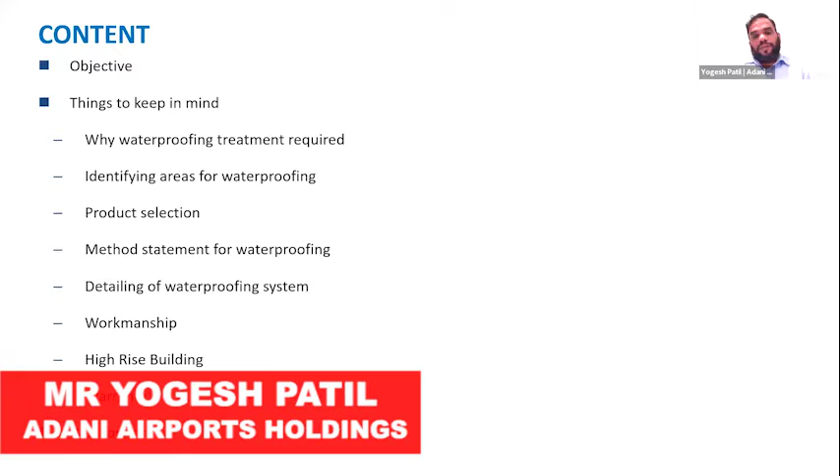So before moving to content, how I started studying waterproofing. In my last organization, we had a lot of seepage complaints from customers, and our NPS was going down due to that. So major complaints were seepage from terraces, from toilets, retaining wall, water seeping through expansion joint, etc. So after a lot of discussion, the task was given to me by the management to go to the root cause analysis and find the solution.

So to study the problems, I visited all sites across India, studied available practices with waterproofing products, and came to the conclusion that we need to improve in each and every step of the waterproofing process. The outcome of that was 1 year long working on SOPs for the 23 elements with an external waterproofing consultant and all internal stakeholders. So this is how I started studying waterproofing.

So the content will be objectives, then things to keep in mind, which will be bifurcated into why waterproofing treatment is required, identifying areas for waterproofing, product selection, method statement for waterproofing, detailing of waterproofing system, workmanship, high-rise building, warranty, and way forward.

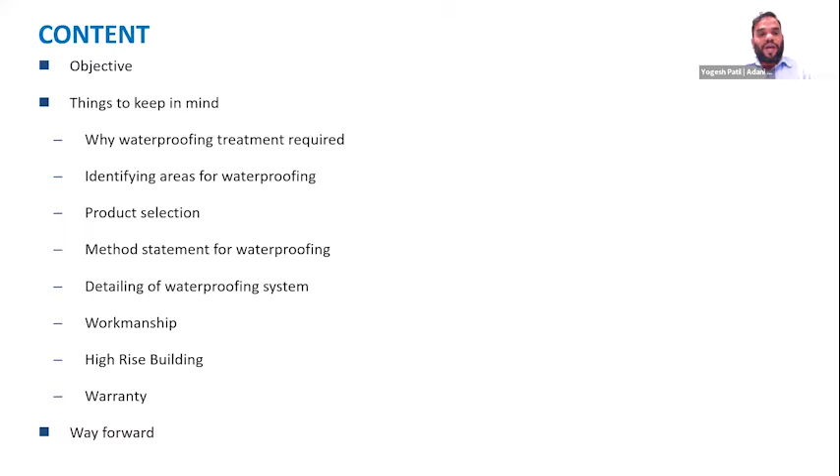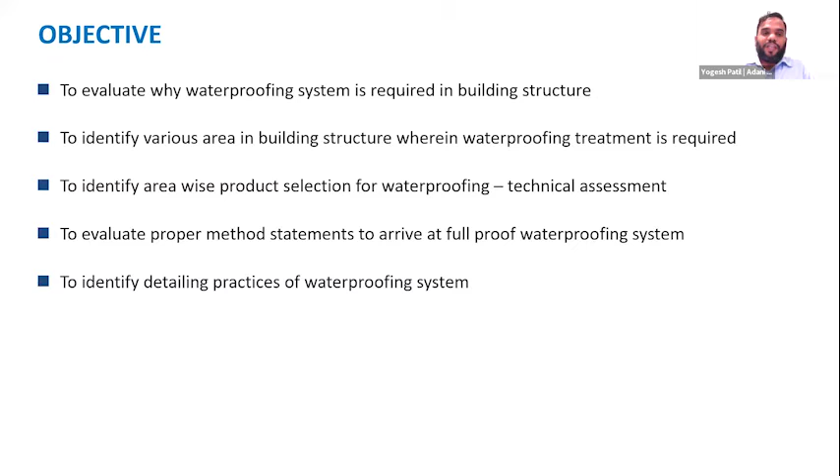So the objective of this presentation is to evaluate why waterproofing system is required in building structure, to identify various areas in building structure wherein waterproofing treatment is required. Thirdly, to identify area-wise product selection for waterproofing with technical assessment. Fourth one is to evaluate proper method statement to arrive at a foolproof waterproofing system, and to identify detailing practices for waterproofing systems.

So why is waterproofing treatment required? It's required to avoid damages to building structure due to seepage of water. Damages result in corrosion of reinforcement, delamination of plaster from concrete, or delamination of paint due to seepage water. Secondly, to avoid unhygienic environment inside habitable spaces due to seepage or dampness. Unhygienic means fungus due to seepage water or dampness, or bacterial growth, which should be avoided. And thirdly, underground tanks which are in contact with soil. If we don't do proper waterproofing, the water will get contaminated.

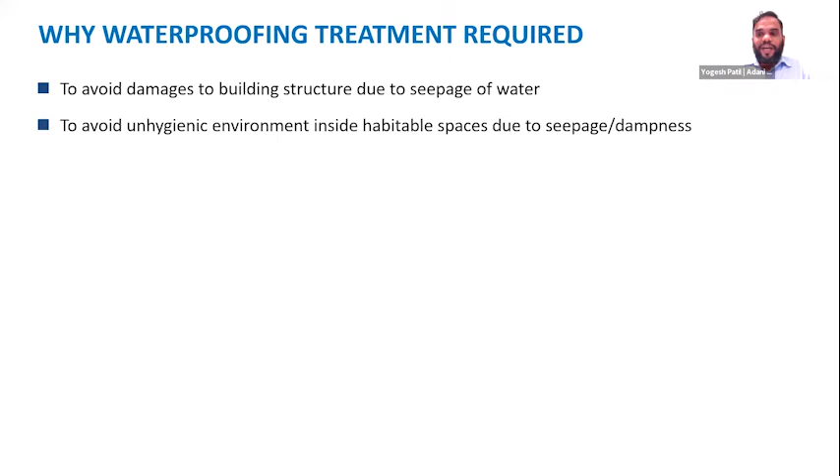So this is a pictorial view to understand the elements which need to be waterproofed properly. You can see from the right side, it is water tank, that is overhead water tanks, then exterior wall protection, inside building wet areas which are covered by toilets, kitchen, balconies, kitchen utility areas. In basement, you can say UG water tank, lift pits. In basements, there are raft and retaining walls. In podium, it is swimming pool, podium itself, which is exposed to rain, and terrace.

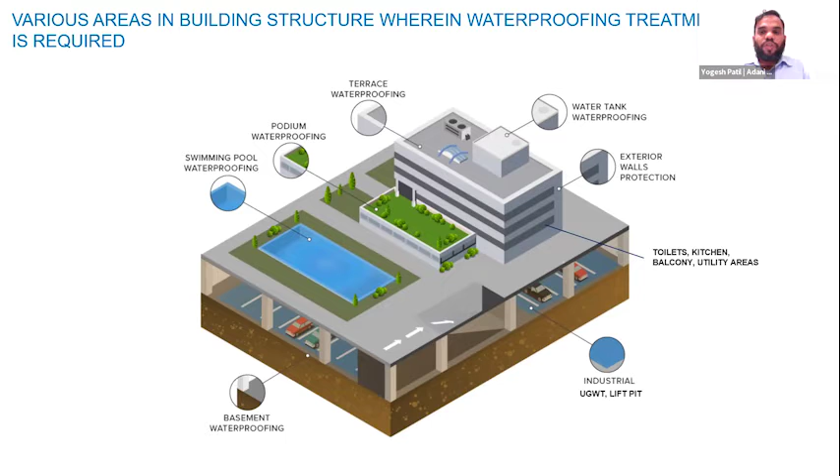So apart from this, while doing construction, there are expansion joints, construction joints, tie rod holes, pipe penetration in retaining walls, pressure release pipe, rock anchors, pile heads. Those are construction activities which are not visible after completion of the project. So those also need to be addressed properly. So we'll go to product selection with specification.

So while selecting the product, we need to keep in mind how to select the product. Points to keep in mind while selecting product for specific area waterproofing: like functional use, whether the building use is residential, hotel, hospital. For residential building, hotel, or hospital, we need to be very careful. In a hospital, it's habitable, it's the patient's interface with the building structure. So we need to be more careful. We need to have specifications. We can't go and rectify it in a hospital. It should be avoided.

Then it's weather condition, rain intensity. If the project is in a coastal area, or maybe somewhere like Rajasthan where rainfall is very low, accordingly you need to select your products. And temperature variation: if temperature variation is very high, then the product selection should be accordingly. Thirdly, for substructures, groundwater table level. If your foundation or retaining wall is in continuous contact with groundwater, then you need to specify the product differently. If the groundwater has sulfate content, then you need a different product.

And defining product material specification is the key element. There are few elements which need to be taken care of, like elongation, tensile strength, shore hardness, resistance to root penetration. So you need to set properly for each product what you want. What should be the elongation? What should be tensile strength? What should be shore hardness?

And lastly, while defining the product material specification, you should know the TDS. You should evaluate and study the TDS, technical data sheets from the product manufacturer. And you should have the TPTs, third-party test certificates, to know the exact properties of those products. I have broadly specified the areas and the options which we currently have. This is all as per my understanding and my experience with waterproofing.

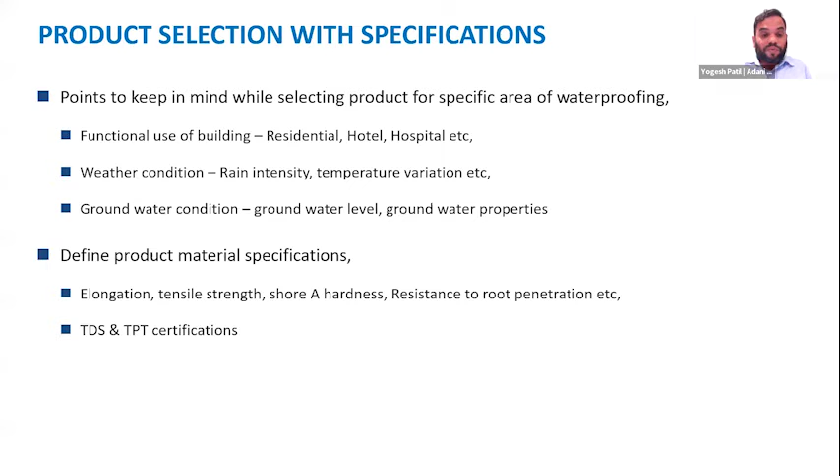So if I see the raft, I have 4 or 5 good options. First is HDPE membrane, second is liquid applied system, third one is EPDM or PVC, fourth is modified bitumen membrane or a crystalline. These all depend on my situation, where my building structure is situated and its severity. As per my earlier slide, I will see the functional use, weather condition, groundwater, and accordingly I will select my product. Then for retaining wall also I have HDPE membrane, liquid applied system, EPDM or PVC, torch applied bitumen membrane or a crystalline, or I can apply 2-component PU membrane also.

For podium and terraces, which right now we are using as soft scapes, like we are having a lot of green areas on these podiums and terraces, so you need to be careful about it. Currently we have 2-component PU or hybrid polyurea membrane, or you can go with modified bitumen membrane, or you have EPDM, TPO, 2K elastomeric cement base or crystalline.

It also depends on the functional use. If your podiums are having a lot of trees or green areas, then you may choose to go with 2-component polyurea, as those are very good with root resistance and all.

Fourth are balcony or toilet, which are wet areas. For wet areas, we have 2-component elastomeric cementitious base, then we have the modified bitumen option, then 2-component PU membrane, we have crystalline. Then underground and OHT. You have 2-3 options only.

First is 2-component elastomeric cement with water-based epoxy coating, because it's drinkable water, so you need to be very careful with it. Then you have only water-based epoxy coating. Third is crystalline. Last is STP.

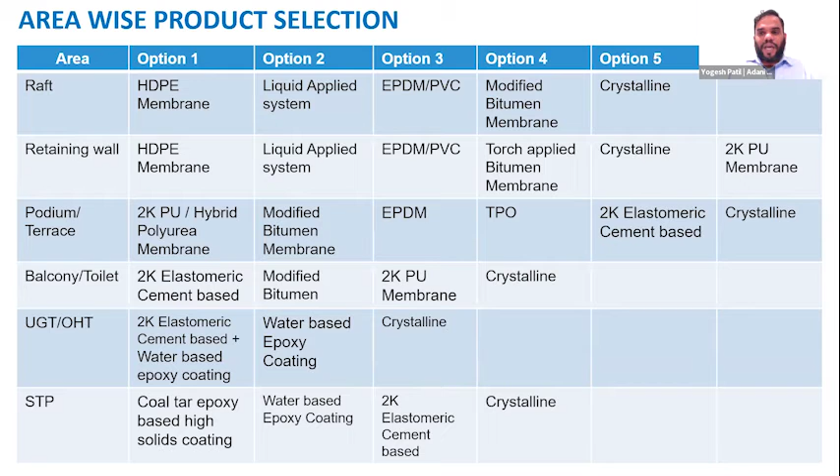For STP we have 3-4 options, like coal tar epoxy based high solid coating, or water-based epoxy coating. Third one is 2-component elastomeric cementitious base coating, or we can have crystalline. So these are products as per my 17-18 years of experience and whatever I do.

Next is the method statement required in waterproofing. For any system to work effectively, we need to have a proper stepwise method statement. In general, the method statement should include, first, surface preparation. Surface preparation should have everything, right from cleaning methodology. If there are cracks, are the cracks less than 2 mm? If the cracks are more than 2 mm, then we should have a methodology to treat that also.

So crack filling details, then pre-pond test. It should mention how much time you should do the pre-pond test. Second is waterproofing layer application, the actual application of the layer. You should have a detailed methodology, in consideration with the product, for applying the waterproofing layer.

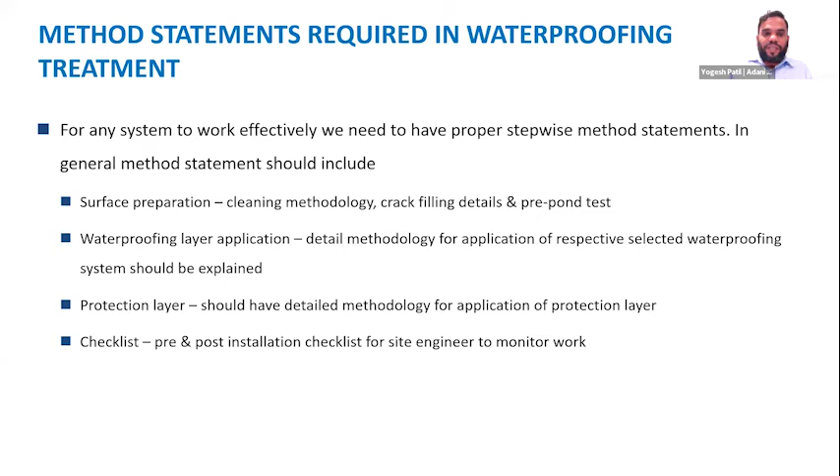Third one is protection layer. Every layer needs to be protected by a protection layer, so that should also have proper methodology, how to protect the waterproofing layer properly. And last but not least, checklist. The checklist should have pre and post installation checklists with the site engineer to monitor the work, which ensures that work is done properly.

Then we'll go to detailing of the waterproofing system. For a waterproofing system to work properly, detailing of work related to waterproofing should be done. A few examples I am giving: we should have proper drawings mentioning how the detailing is done. Like corner detail. For example, you can take bathrooms, toilets, or the terrace also. The horizontal to vertical surface detailing is very important. The major point of leakage is the junction, so there should be corner detail, proper connection.

Then there is pipe penetration. Pipe penetration can come in the terrace, in the retaining wall, in wet areas also. So pipe puncture in horizontal surface, vertical surface. The detailing of that, how it will get connected to the concrete, how the waterproofing treatment will be done, how that integration will happen, should be done in drawing format also.

Then upstand. Right now, if you see, there are a lot of upstands in the terraces, maybe for pedestals. So the corner, like joints between pedestal and horizontal face, should also be properly treated. And there's the parapet wall, merging of terrace waterproofing with the parapet. That should be defined in the detailing of the waterproofing system.

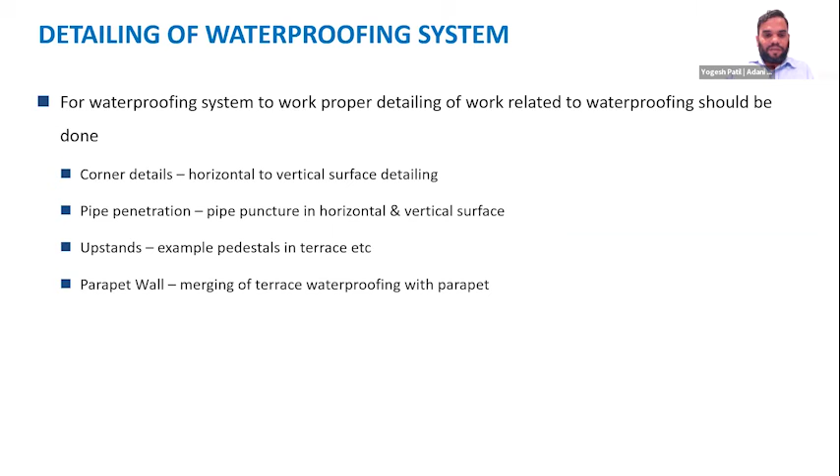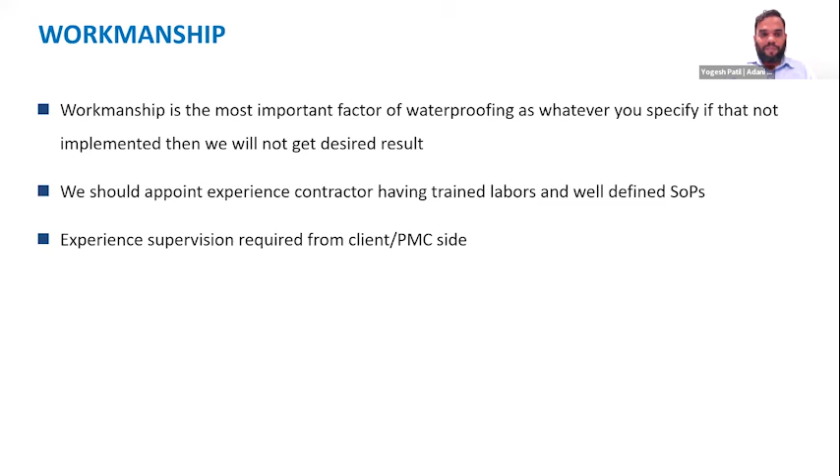Now we'll come to high-rise buildings. In high-rise buildings, structural design governs due to the drift. Drifts are due to seismic forces and wind forces. The foundation of high-rise buildings needs to be waterproofed properly in order to avoid any damage due to groundwater. So we need to be extra precautious while defining waterproofing treatment for high-rise buildings.

The selection of material is a key element, as there will be higher movements in buildings. As the building height increases, the drift increases. Compared to a normal 15-story building, a 50-story or 60-story building will have huge movement due to wind forces. Hence, the product properties, like elongation and tensile strength of the waterproofing material, need to be on the higher side compared to normal building waterproofing systems.

Also the protection layer should cater to the movement, and maintenance of the protection layer will be a key task. In high-rise, I personally feel facility management needs to play a major role, to check regularly what is happening to the protection layer and the waterproofing layer.

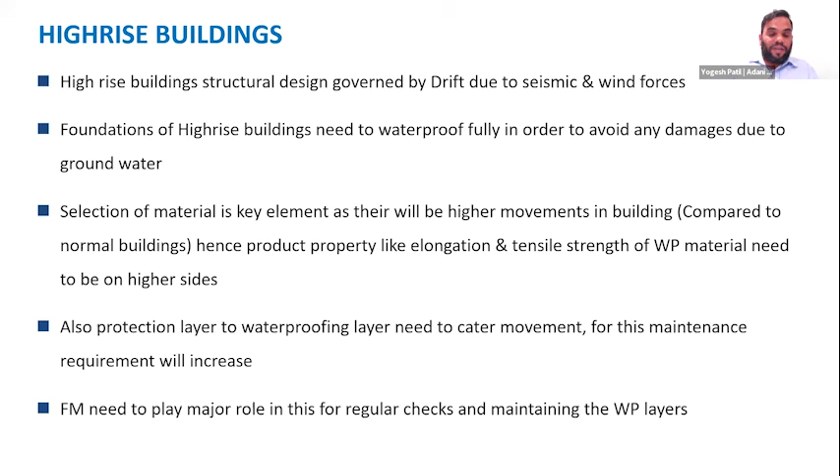And lastly, we will see warranty. While giving the work, we should have an authorized applicator from the product manufacturer itself in order to get a back-to-back warranty. This is required to avoid any blame game over seepage or water leakage issues. Personally, I feel the warranty should be for a minimum period of 10 years at least.